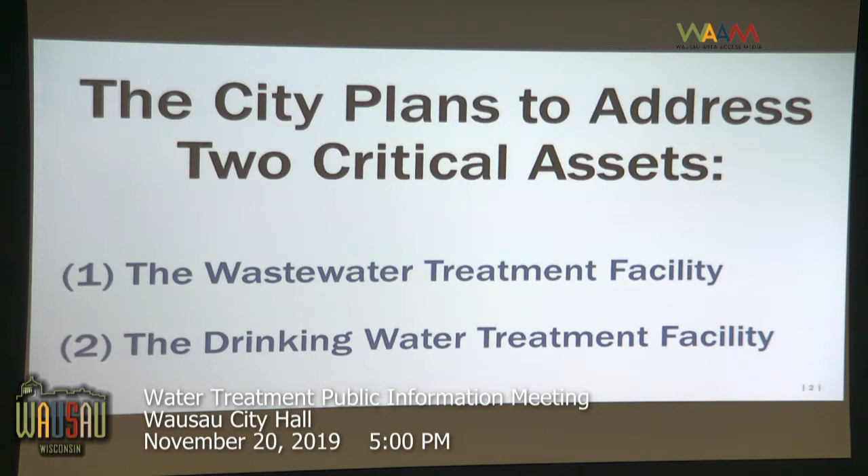So as Eric said, the city is now in a position where it needs to address two really important assets because of issues and concerns we'll be talking about throughout this presentation. One is the wastewater treatment plant that takes the water from the sewers from all of our homes and businesses, cleans it up, and discharges it back to the Wisconsin River. The drinking water facility takes groundwater out of the ground, cleans it up, and makes it suitable for us all to drink.

So let's talk about the wastewater treatment facility project. This project is really being done for three core reasons, three primary issues that this project will address. The first is age. We'll look at how old the facility is, but it's been more than 30 years since that facility was upgraded.

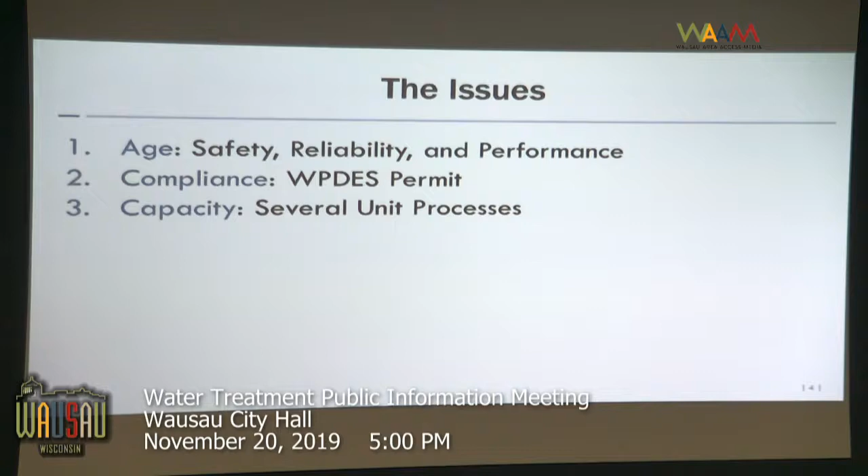Over that amount of time, infrastructure has deteriorated, equipment has gotten old and needs to be replaced, and safety standards have changed. Rules change, the WPDES permit rules change. We'll talk more specifically about those in a bit, but some improvements need to be made to maintain compliance with the discharge permit that regulates this water that goes back to the Wisconsin River.

And then in general, the capacity of the plant is fine, but there are some isolated areas as we look over the next 20 years that need to be upgraded from a capacity standpoint.

So we'll talk about the first issue, first and foremost it's just age. This is a tired facility, it dates back to 1939. The site plan of the wastewater treatment facility is color-coded according to when different structures were constructed. The oldest structures were built in 1939 - they're 80 years old, still in use today, and they'll still be in use after this project is over.

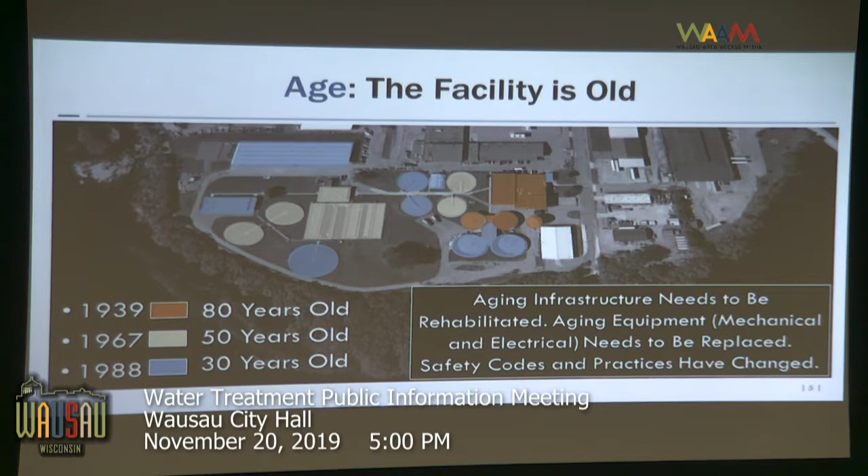The second generation occurred in 1967. Those structures shaded yellow in the presentation are 50 years old, built in 1967. The new stuff was constructed in 1988. It's just time to address that aging infrastructure - it needs to be rehabilitated for another generation of service, and old electrical and mechanical equipment needs to be replaced. In addition, some safety standards have changed since 1988, the last construction project there.

So the compliance issue is really, first and foremost, phosphorus. The rules governing discharges to the Wisconsin River have changed so that this facility and most facilities that discharge to the Wisconsin River need to remove more phosphorus than they have historically. Currently, the treatment plant needs to meet an effluent phosphorus concentration of 1 milligram per liter. That's going to change so that it will need to remove phosphorus down to about 0.5 milligram per liter, and over time it could be even as low as 0.2 milligrams per liter.

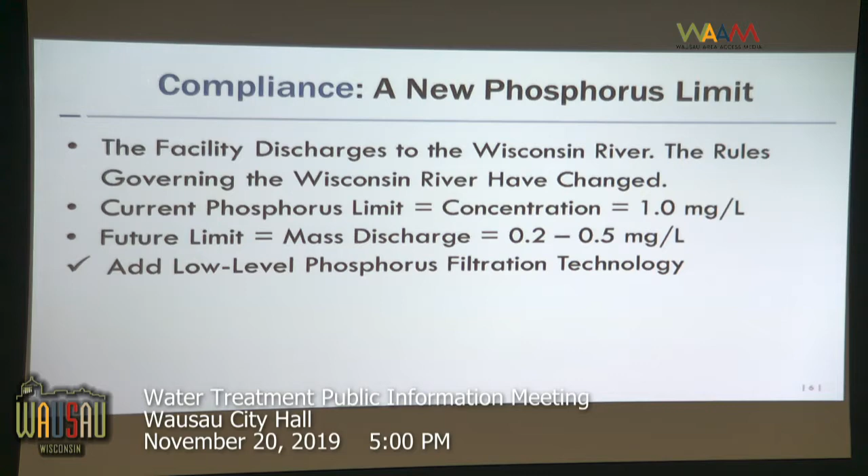The Wisconsin Department of Natural Resources Board recently approved the TMDL governing the rules for the Wisconsin River that made this change, and this will be in a future permit. The plant isn't capable of meeting those lower limits today.

There isn't a hard regulatory requirement right now to do something different than what the facility does with its biosolids, but the biosolids program, which has a long, successful history, has become more and more challenging. Weather patterns have changed, farming practices have changed quite a bit, and today farmers and agricultural operations need a nutrient management plan. All of that together makes land application very difficult, and it's only going to become increasingly difficult moving forward.

This was the first year in many years, and last winter might be representative of the new normal. For the first time in a long time, a significant amount of the biosolids actually had to go to a landfill.

This project will address that concern by putting in a drying process that'll take the wet biosolids and dry it to a Class A material that could be used by landscapers and other agricultural operations, and it will no longer be permitted. It provides a great deal of flexibility that the facility's never had, and it's a safer biosolids product than the facility's ever produced.

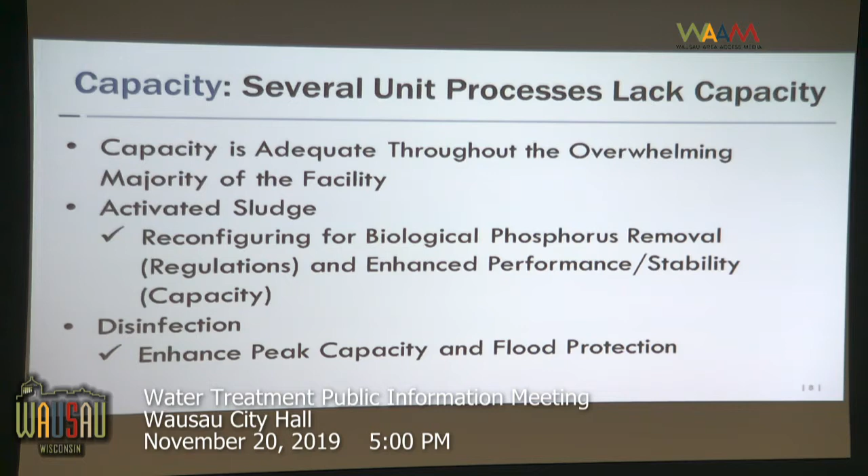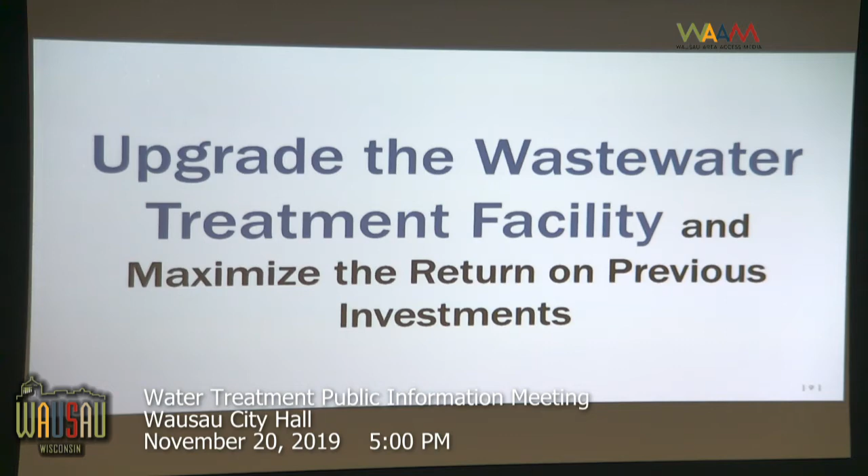We'll see in a little bit, and this has been well publicized and discussed at previous meetings, commission meetings and council meetings. The overall project cost is 80 million dollars. That's a tremendous amount of money for any community, a lot of money here in Wausau. One might think you're going to get a whole new treatment facility for that.

That's not the case. The plan here is to upgrade the existing facility to address these different concerns and issues I went through, and to maximize the use of that tremendous investment Wausau has already spent on that facility. This is an upgrade project using as much of that existing infrastructure as we can. We'll look at that in a minute.

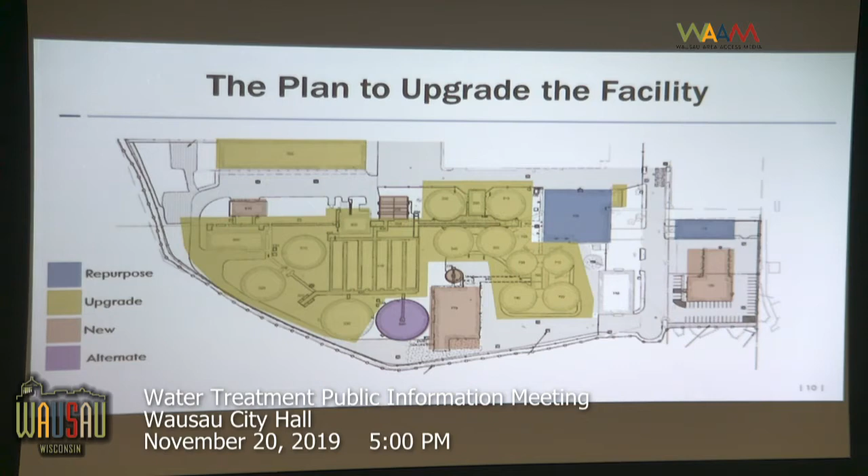And then the orange structures, and there aren't a lot of them, will be new structures. The biggest investment will be in that new biosolids processing facility I mentioned before, new thickening, dewatering, and drying. That's the large orange structure in the middle of the site. The message, though, is the overwhelming majority of the infrastructure that's there will remain in service for another generation or multiple generations moving forward.

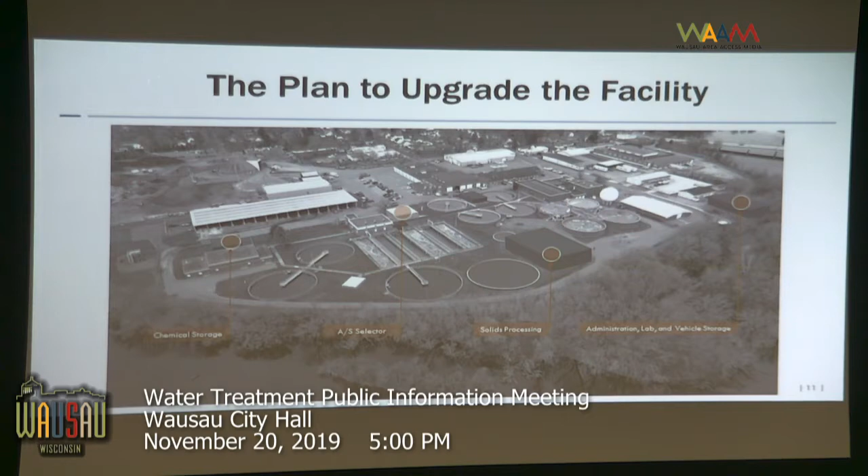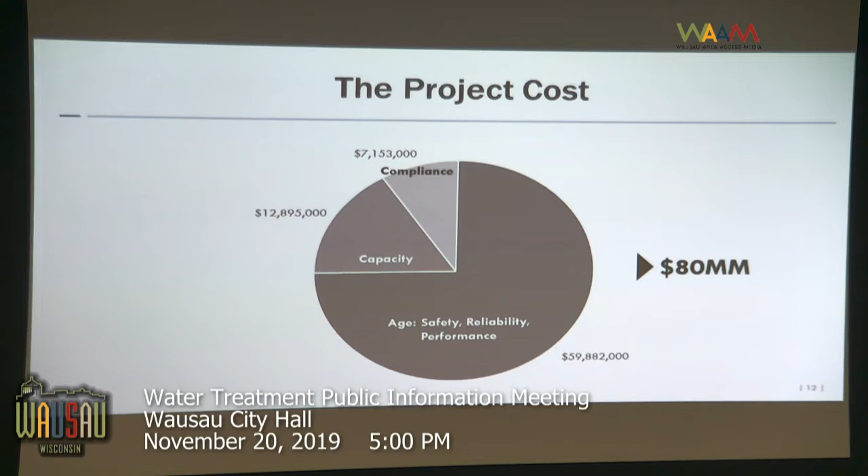What everybody wants to know is, what is this going to cost me? This is identical information to what we've presented before, with one exception: before we looked at it on a monthly basis, but we all pay our bills in Wausau on a quarterly basis. So this is looking at what those quarterly rates will be to fund that $80 million project. It's the user cost to finance that capital project.

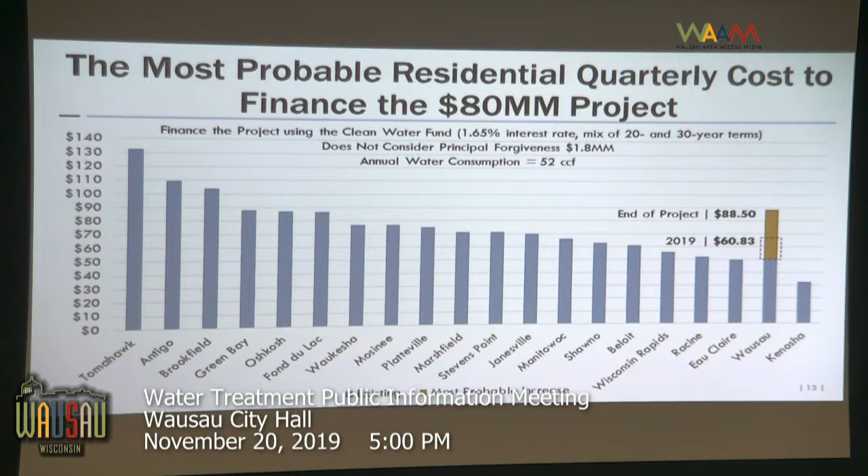Today, the typical residential user here in Wausau pays about $50 a quarter - or they did back in 2018, before the first rate increase for this project went into place. So last year, the typical residential user paid about $50 a quarter. This year, 2019, the rates are up slightly, and the average typical residential user pays about $61 a quarter. When this project is done and the community is paying the principal and interest on that loan, the typical residential user will pay about $88.50 a quarter.

And the money, where's the money going to come from? There's a very good, reliable program here in Wisconsin - we're fortunate this way - called the Clean Water Fund. That's a government, federally subsidized loan program for projects just like this. Oftentimes that's a 20-year term, and there are instances where communities can use a 30-year term, with an extremely attractive interest rate of 1.65%.

This analysis assumes a little bit of both: some of the infrastructure funded for 30 years, some for 20 years, and the equipment for 20 years, with the blended rate being the result, all of it at 1.65%.

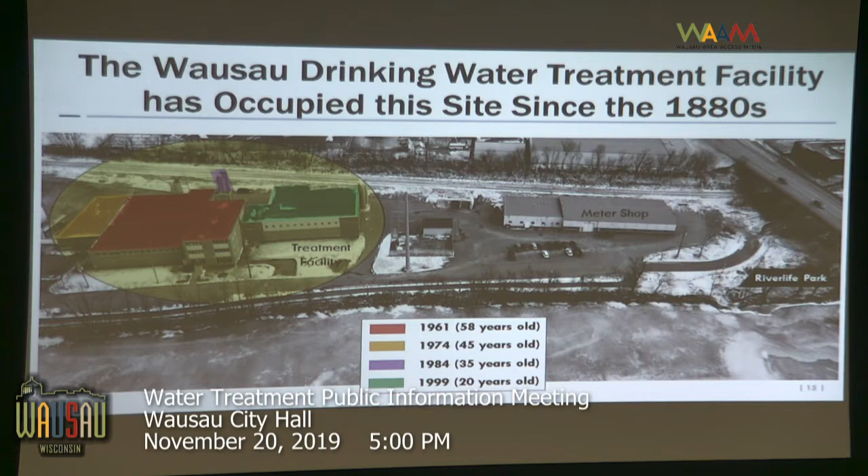With a lot of work potentially needed at this facility, the city undertook a planning process to wrap their arms around exactly what improvements need to be done. Not only age-related ones, but also ones required by the state, specifically the DNR, who oversees all water treatment facilities. Every couple of years they come through a plant and complete what's called a sanitary survey, identifying areas that don't meet new or improved codes. In the case of some things identified in their last survey here, they've advanced them to a point of setting a timeline where they must be completed.

Am I hitting the button the wrong way? Am I supposed to go down? Right arrow, thank you, I'm sorry.

Again, a similar grouping of the issues we found breaks into 3 major categories. One is longevity - we know we need to do a lot of work at this facility. Is it really a good idea to make a substantial investment at this location, understanding it's a site that is constrained along the riverbank and adjoining railroad track, with some changes in the general character of the area due to the Riverlife project.

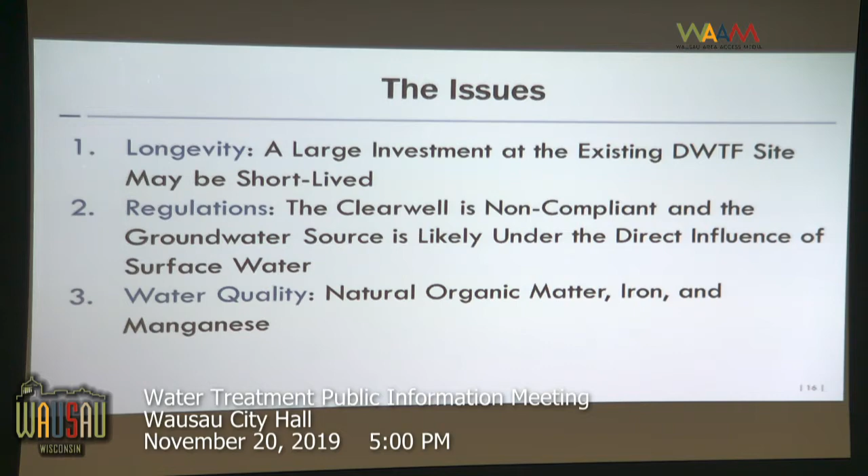The second thing to point out is that it's within the 500-year floodplain. The main floodplain is generally called the 100-year plain, and you're not allowed to have a water treatment facility in that area at all. When this plant was originally built in 1961, it was acceptable to construct a plant within the 500-year floodplain - something that if built today, we would not be able to do in that same location, since regulations no longer allow these facilities to be built in the 500-year floodplain.

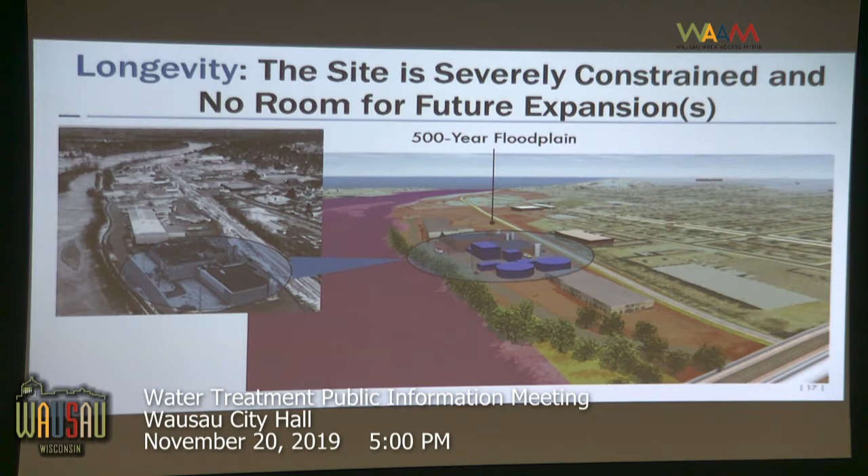In terms of regulations, one key issue identified is a non-compliant clear well. This is after the water is treated and disinfected and ready to be pumped out into the system for our use - it resides in a tank. In the case of this 1961 facility, that tank was built below ground, and given how close we are to the river, it also happens to be below the water table.

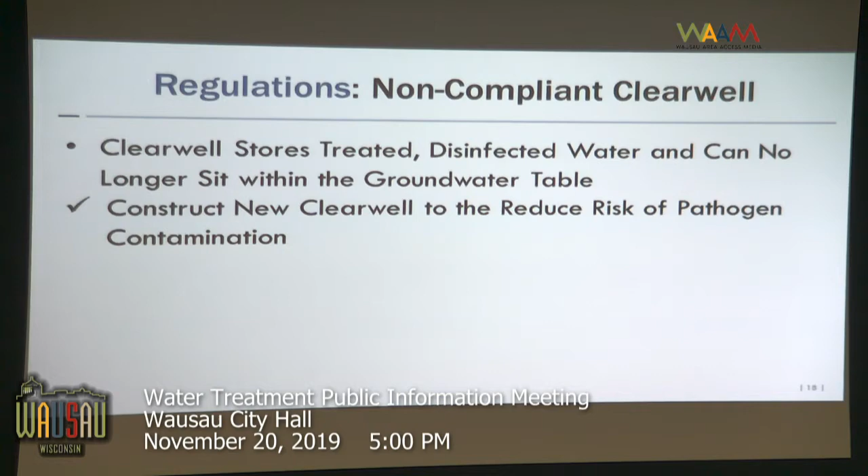This has been an initiative of the DNR over the last several years - there are many plants throughout the state with this same condition. However, they are now requiring all communities to relocate these clear wells out of the water table, so some structures shown on the previous slide were to build tanks on site that are above the water table. The primary reason is that with groundwater and untreated water, there's a risk of untreated water infiltrating those concrete structures, creating a risk of pathogen contamination.

Another regulation that has cropped up, and this is actually a rather recent DNR ruling, is something called groundwater under the direct influence. Wausau's wells are relatively shallow, around 120 feet deep, give or take, some deeper, some a few feet shallower, but in the world of wells, that's classified as shallow. The concern is that at that depth, the filtering capacity of the soils is reduced to a point where there may be pathogens or viruses present in groundwater. That's something that's a function of research over the last decade or so, and it's something all communities with shallow wells are likely going to have to address with any plant upgrades.

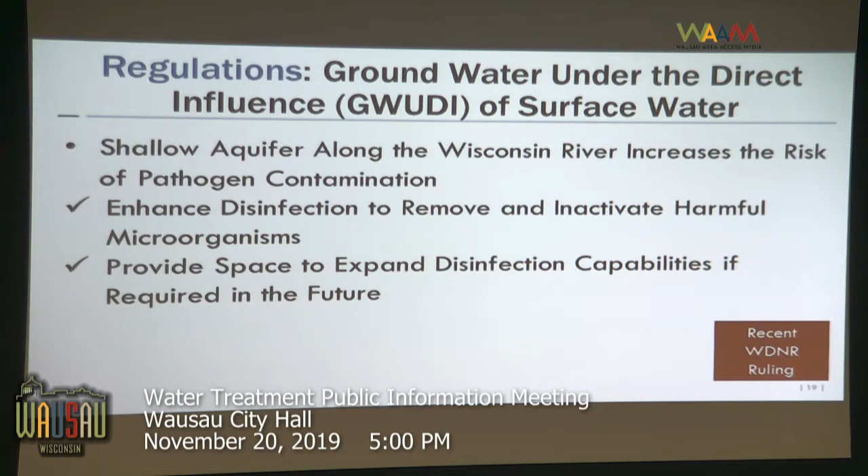Since there could be a greater risk for some pathogens, we want to make sure we do an extra good job of disinfecting, and also provide sufficient time in our tanks and reservoirs to properly disinfect the water before we pump it out. There are also other issues this raises in terms of how the plant must be operated, plus additional requirements about testing and methods of treatment.

The final issue we were talking about was water quality. Again, these are mainly things we want to improve to do a better job of producing better water for the customers of Wausau Waterworks. The first is to remove natural dissolved organic matter. We're in an area blessed with lots of trees and leaves, and anytime rainfall falls through and infiltrates that matter, a little bit of it dissolves into the water.

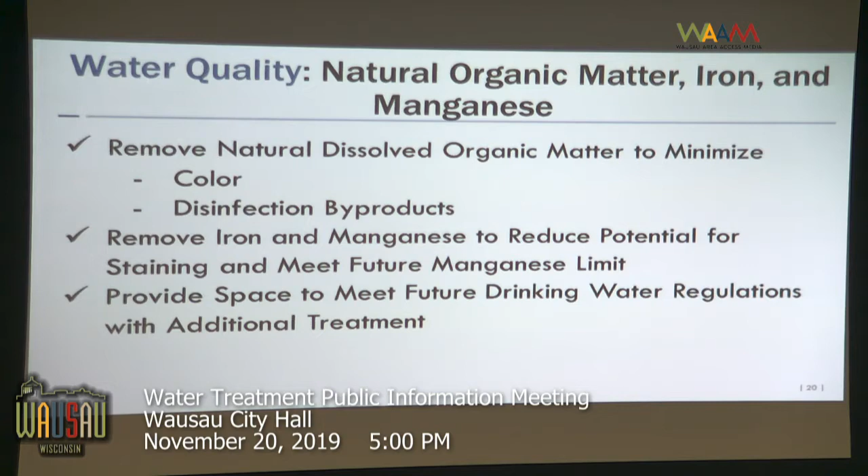When this water's safe, it's not causing harm, but it does cause some aesthetic issues. One noticed in Wausau water is a slight green tint to it. You notice this most if you fill up a bathtub or a white styrofoam cup. It's not harmful, but it's a cosmetic and aesthetic thing the city has recognized, and they've had more comments and complaints about it. So certainly one of the things we'd want to do is improve that water quality and remove that color by removing the matter that creates it.

The other item is that all the communities in the Wausau area have lots of iron and manganese in the water. That's currently the primary reason we treat our water today, and we just want to do a better job of removing that iron and manganese going forward.

And then finally, for water quality, we want to provide some space for future drinking water regulations and additional treatment. We're fixing the needs identified today, but as things progress in the next generation, there may be other challenges they need to face in water supply, and we want to give them enough space to handle those as well.

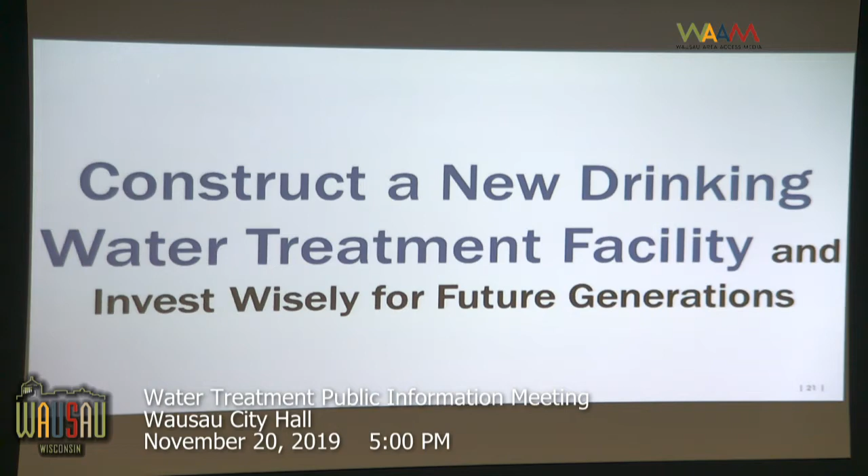So when all of these facts were presented early this year, or late last year and early this year, to the Utility Commission and then to City Council, the decision was made to construct a new drinking water treatment facility. This would be done on property the city already owns, and it's actually closer to most of the wells we receive our drinking water from. It's located about a mile directly north, on the other side of the river from the existing facility.

This is a basic schematic showing the location of the plant on the property just north of Bugbee Avenue. On the left side of the photo would be the intersection of Bugbee and Burek Avenue, and on the north end, where you see a driveway entering to reach the new facility, that would be East Campus Drive.

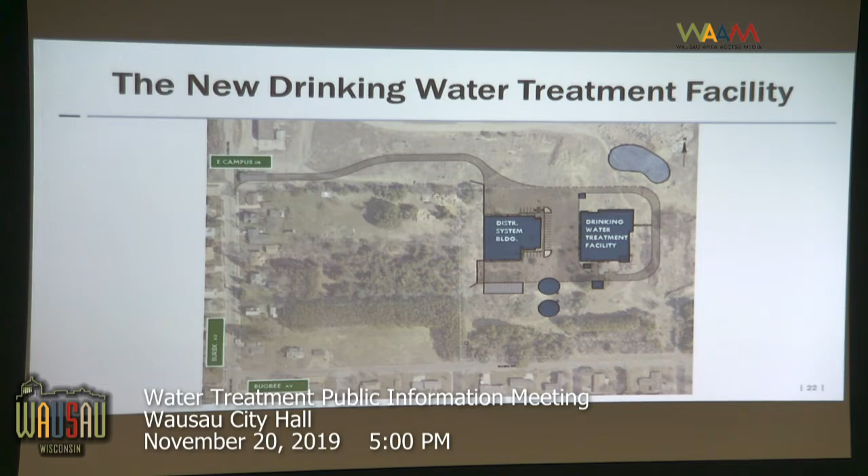The site the facility would be constructed on is, I think, around 13 acres in size, and that will house the drinking water treatment facility and our above-ground clear wells, so we don't have any of the water table issues we have at the existing plant. There's also room for a distribution system or an O&M building to replace the garage and meter shop located between the bridge and the existing water treatment facility.

A couple other things I wanted to point out: throughout this design phase and at other public information meetings, we recognized that this facility will be constructed in what is primarily a residential area. So the siting of the plant within the property has been done to move it as far north as possible to maintain as much of the existing tree screening along Bugbee Avenue. The ground elevation there is also recessed down from most of the streets in the area, so it'll be a little further below to minimize the visual impact of this facility to the surrounding neighborhood.

As Mike mentioned with the wastewater plant, we're operating under the same costs discussed in previous meetings. Going back to our planning level work, our project budget is a total of $41 million. This includes money for constructing a new water treatment plant, improvements to get the wells to pump to this new facility, and changes within the water distribution system to pump water out to the rest of the community. So this total cost is estimated at $41 million.

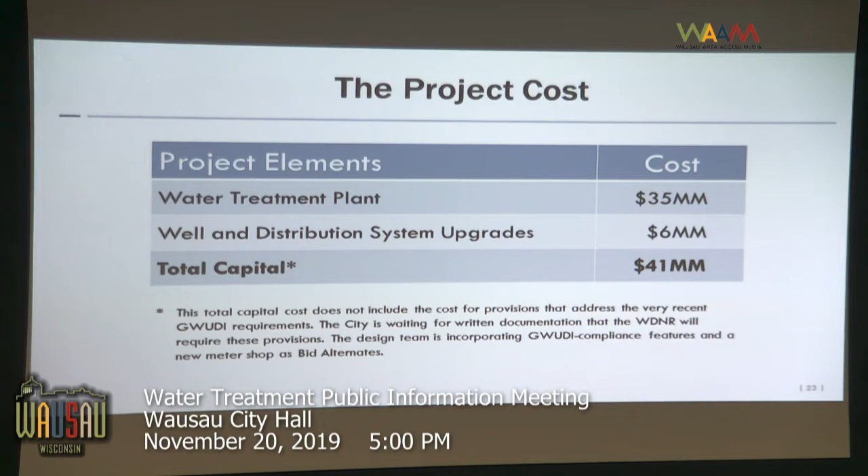Similarly, everybody in the city gets a quarterly sewer bill, and you also get a quarterly water bill. On a quarterly basis, the average user pays a little more than $46, almost $47 a quarter. The construction of this project under the planned $41 million budget would result in an increase of just under $20 per quarter to the average residential user, with the estimated quarterly cost of your water bill to fund this new plant being $66.34.

The graph that you see is how Wausau's water rates, in the blue area, compare to many of the other communities within the area, and also much of the peer group—similar-sized cities throughout the state.

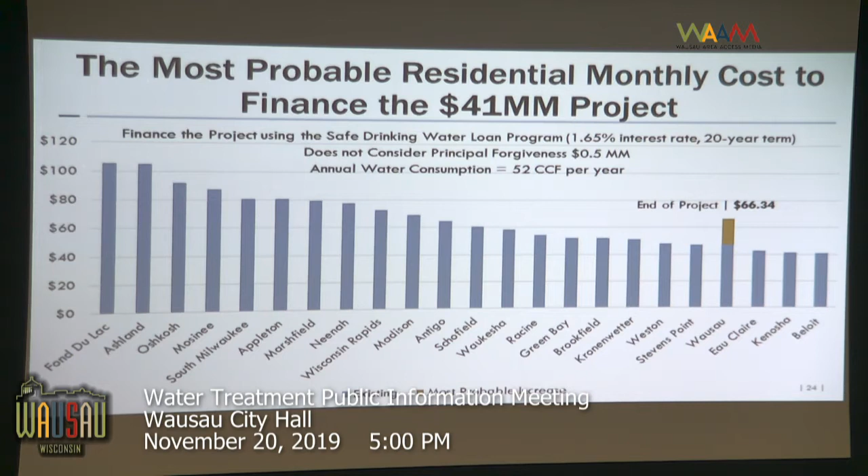That's really all we wanted to present on the water treatment facility at this time. As Mike mentioned, we would like to entertain any questions on either the wastewater facility or the water facility at this time. I don't know if there are any public comments or questions that we can take.

One of the things I'd like to point out is that over the last couple of years, we started with the planning phase of both of these projects. When we stepped into this initially, it was because our capital budgets were increasing every year, and so borrowing more and more money every year, with the projects getting larger, was the reason we stepped into the facility planning phase. The issues within the plants are pervasive—if we touch one part of the plant, it's not just that we have to make that upgrade to accommodate that treatment process, we also have to deal with new code issues and address safety issues to make the plant compliant. So as we moved through the plant and the different processes for both of them, those costs kept escalating.

So we hired Becher Hoppe and Donohue to put those plans together, working with the DNR, to try to figure out the best course of action for us moving forward with the Wausau Waterworks and the utility. We got to the point where a full upgrade at the wastewater treatment plant was the best option at this point—not only from a single project standpoint, but borrowing rates are a great time to borrow money right now, knowing that we're going to have to increase rates throughout the city for this.